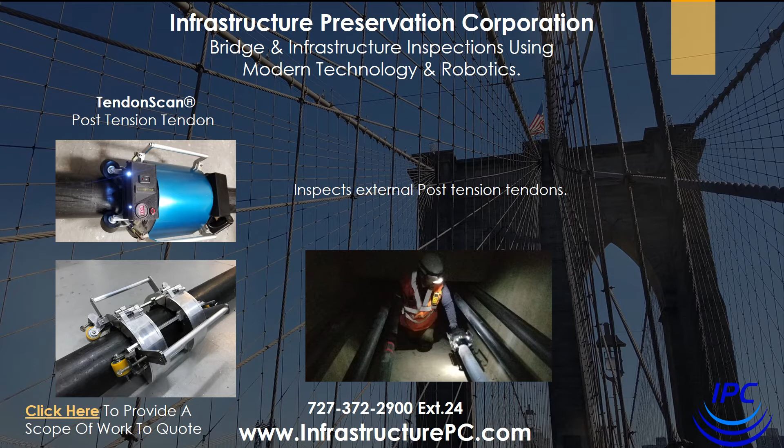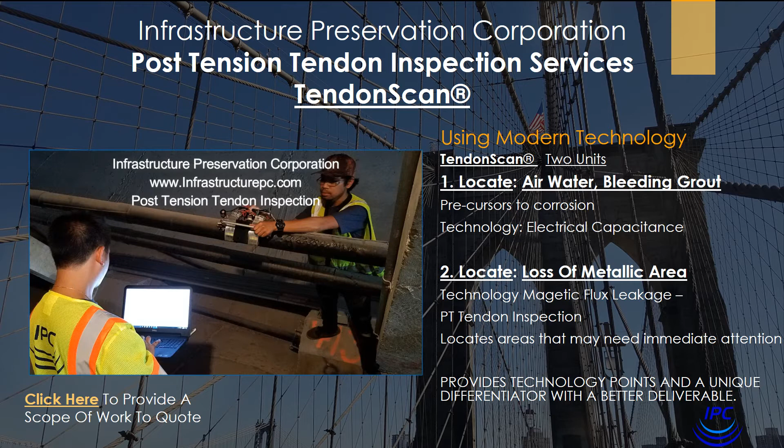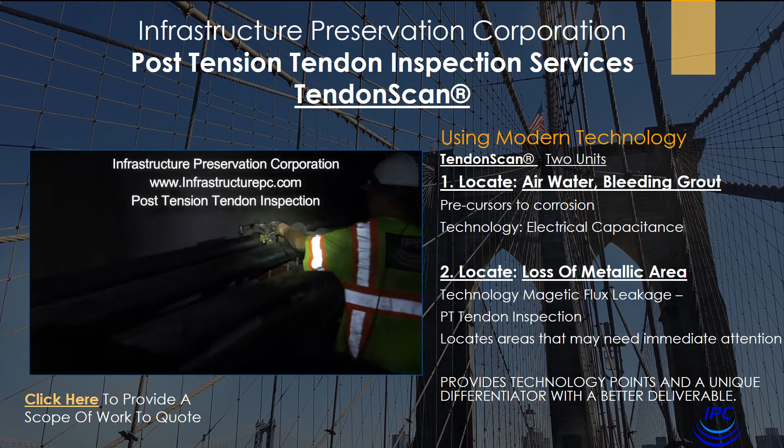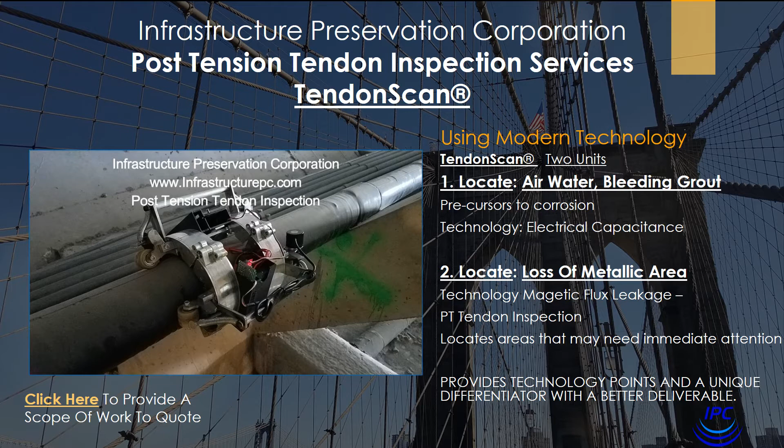IPC's post-tension tendon inspection service consists of two devices. The first device locates air, water, and bleeding grout inside a post-tension tendon. Air, water, and bleeding grout are the precursors to corrosion, so they will give you advanced warning, great for preventative maintenance, to keep an eye on areas of concern.

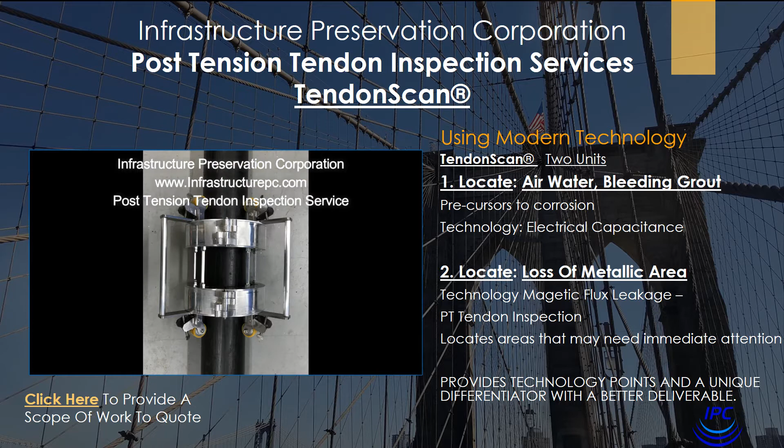Typically, when you find air, water, or bleeding grout, the asset owner would immediately like to know if there's loss of metallic area. So we developed a second device, which is a magnetic flux leakage post-tension tendon inspection device that locates loss of metallic area. This will show you areas with a more immediate need to further inspect or open up and repair.

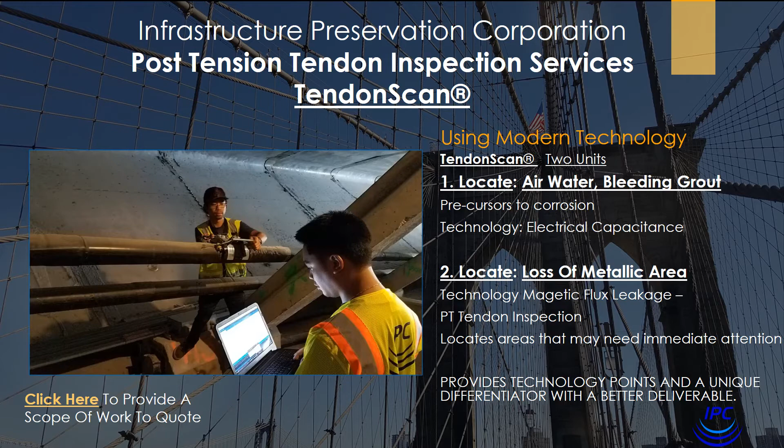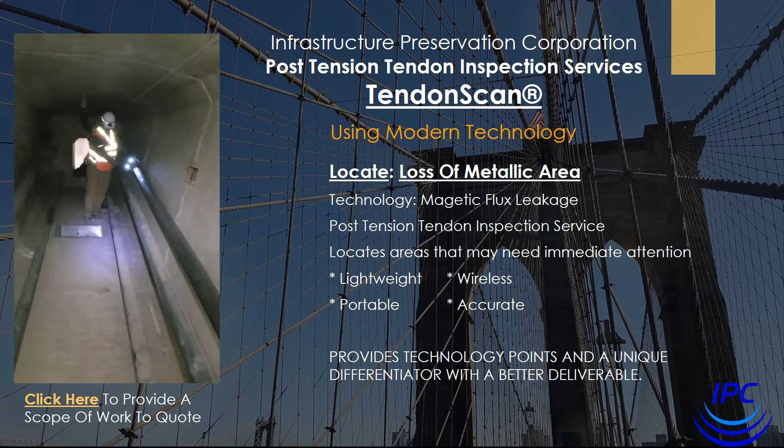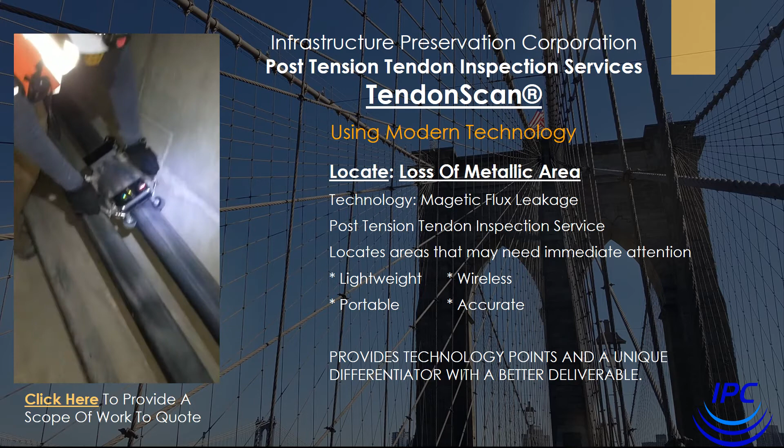TendonScan, both of these devices are lightweight, they're wireless, they're portable, and they're accurate. The TendonScan devices are lightweight, they're wireless, they're portable, and they are accurate.

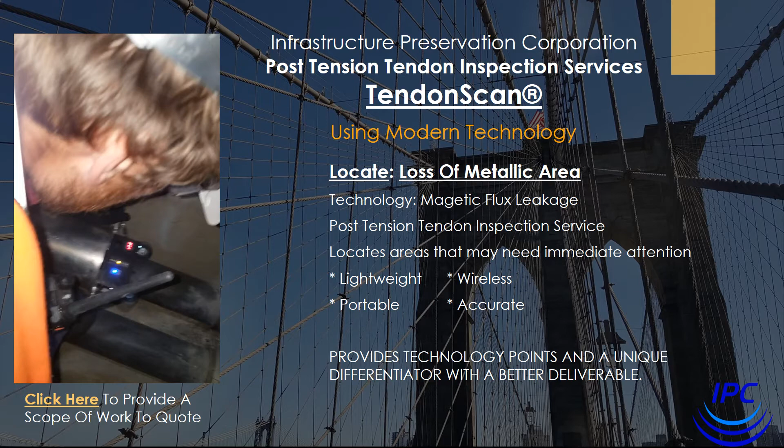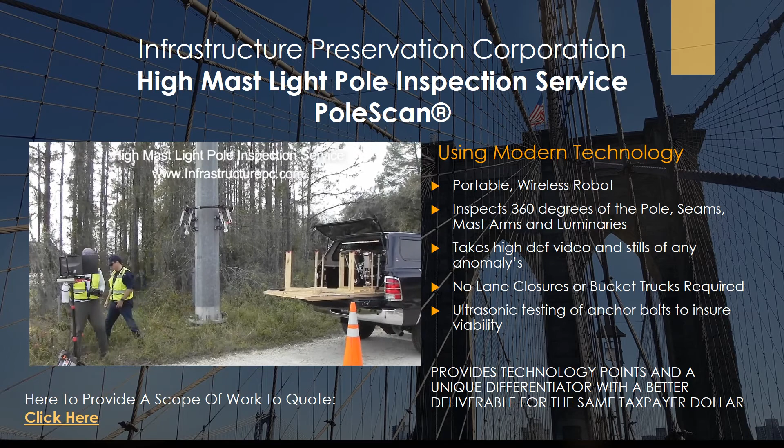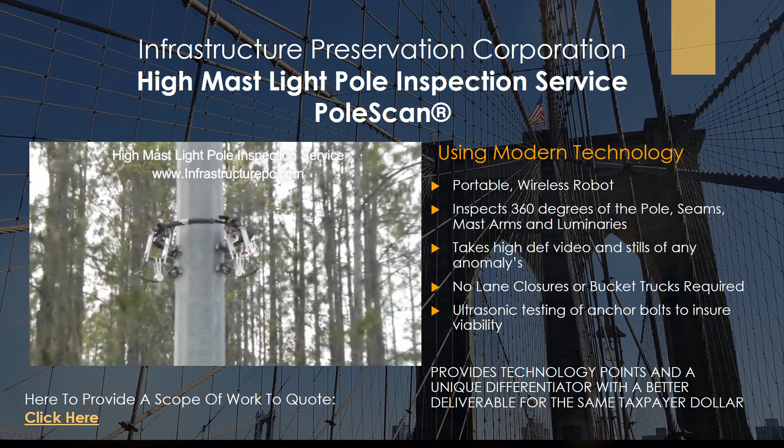The next service is PoleScan. PoleScan is a high mast light pole inspection service, and additionally a repair robot. PoleScan also contains two separate services. I'm going to talk about the high mast light pole inspection service first, which is a robot that clamps onto the high mast light pole.

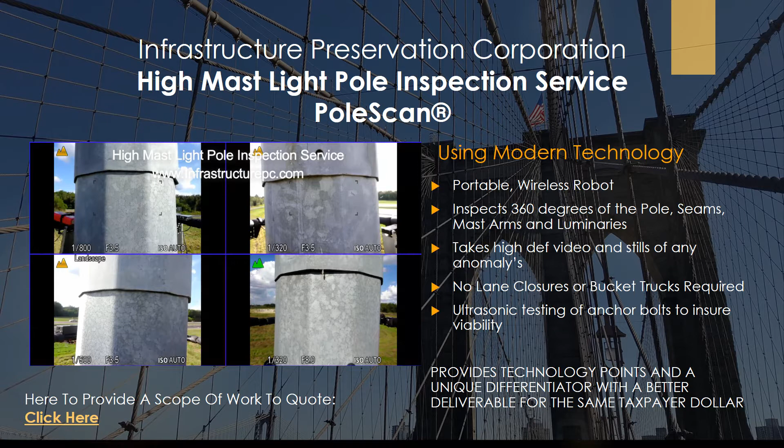It conducts a 360-degree inspection of the entire pole, the seams, the mast arms, the luminaires. It takes high-definition video of the entire pole as well as high-definition snapshots of areas of concern. The information is beamed down to a portable base station where there's an experienced inspector reviewing the data as it comes in. There's no lane closures or bucket trucks required. And it provides a lot of information on the high mast light poles.

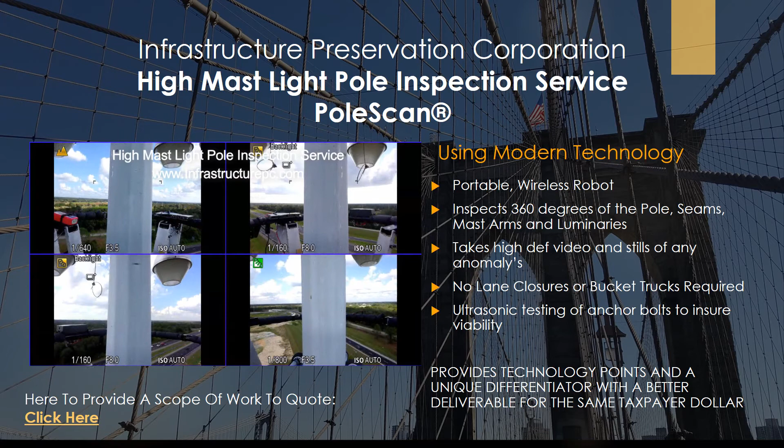Part of our inspection protocol, we recommend doing ultrasonic testing of the anchor bolts, which also are an area of concern, especially if you're only inspecting these poles every 5 years. Conducting ultrasonic testing of the anchor bolts to be sure there's no cracking or breaking is recommended.

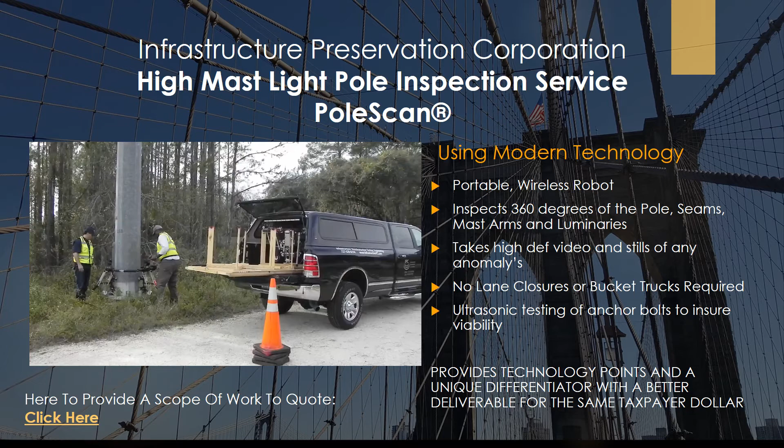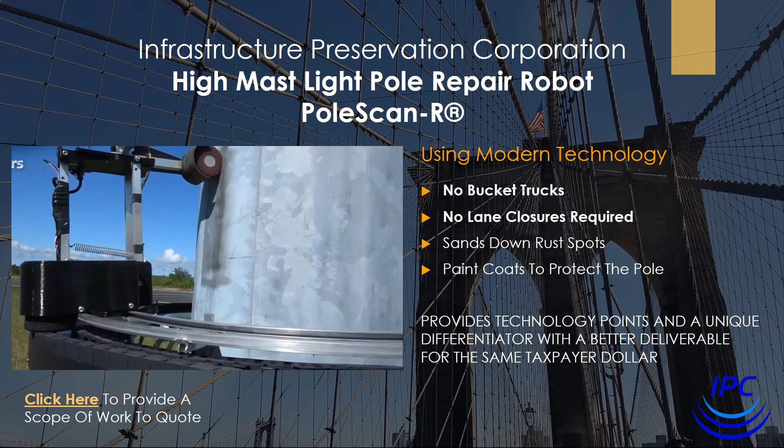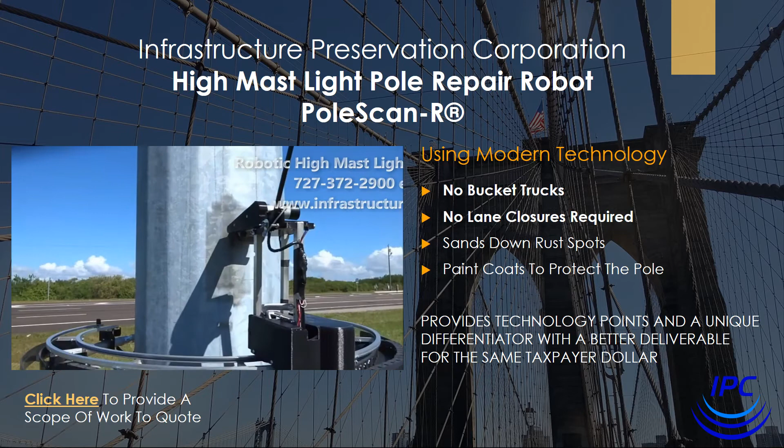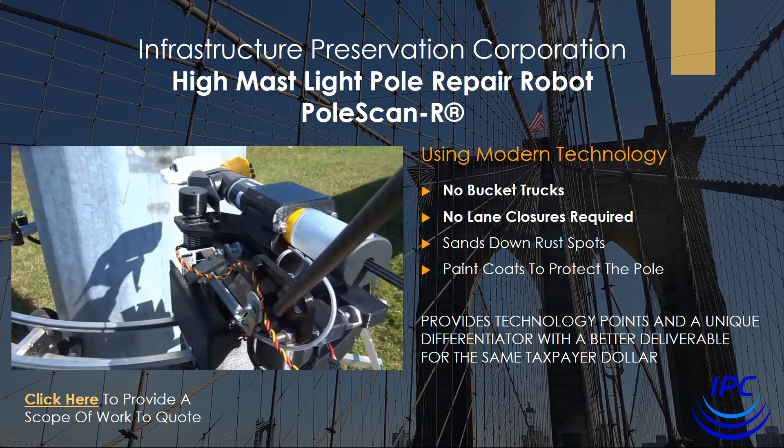So once you find issues in the high mast light pole, the second device that's part of this service is the high mast light pole repair robot. This device clamps onto the pole itself, will climb to the area of concern, sand down the rust spots, and paint coat to protect the pole. There are no lane closures or bucket trucks required. And this device can help easily make the repairs on the high mast light poles.

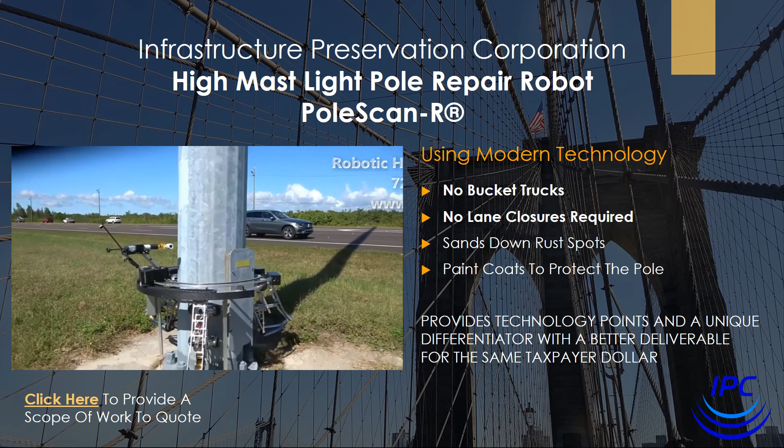Infrastructure Preservation Corporation looks for better ways to provide quantitative data to the asset owners.